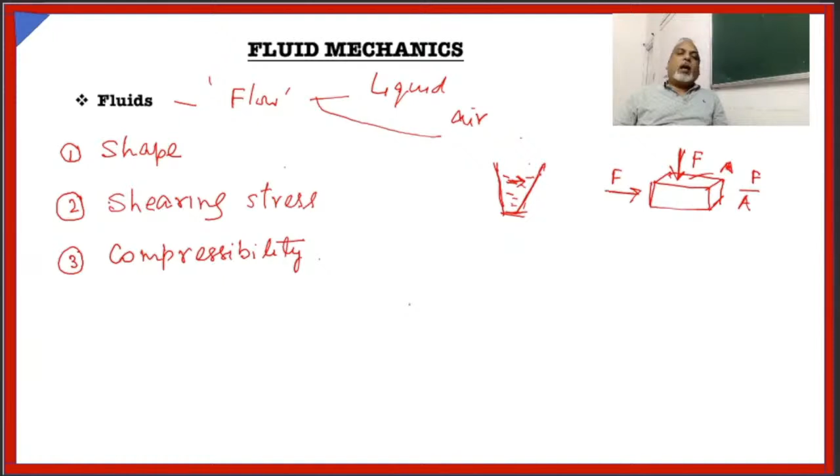Now another factor is compressibility. Solids, we know, are incompressible. Liquids are also incompressible. But in case of air, air is a compressible fluid.

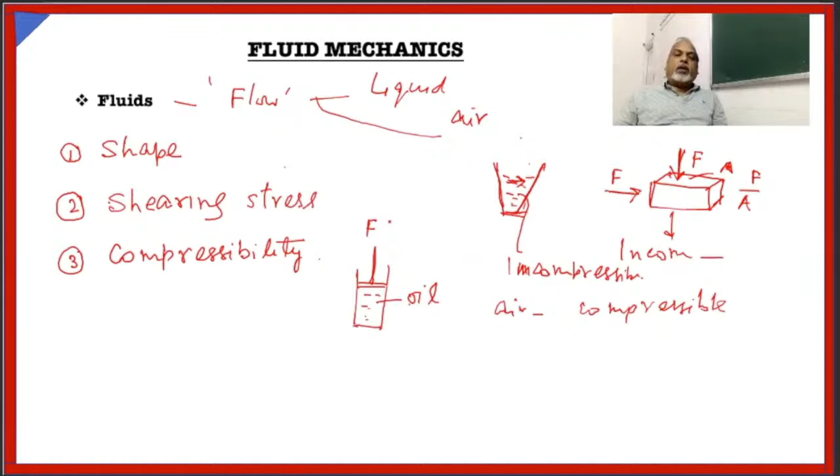Suppose you have a piston, and here you have oil. Oil is a fluid. If you apply a force, you can compress this to an extent only, you cannot compress it fully. Ultimately this liquid will start showing its incompressibility property, and this property is used in mechanical engines.

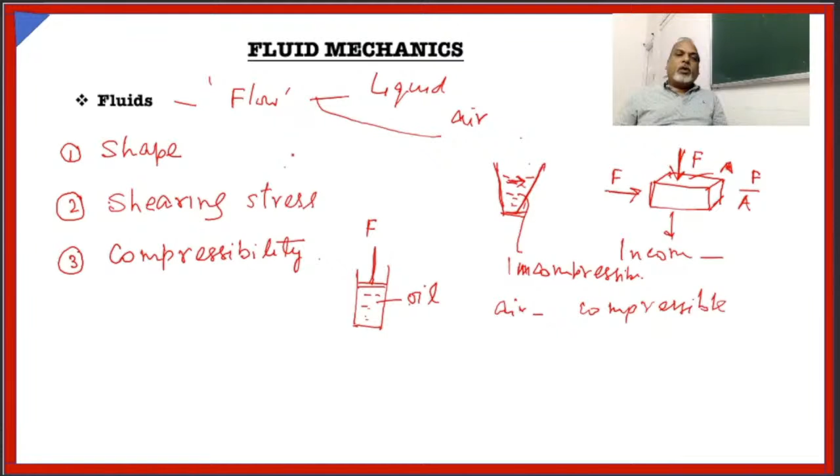This you will study in your mechanical engineering. So this is about fluids. Now let us see what is density. Density is denoted by rho. It is the ratio of mass upon volume.

But here one important fact is there, the mass should be uniformly distributed. Suppose you have a block. If it is a solid block, you can measure its mass and volume, and this will give you the density correctly.

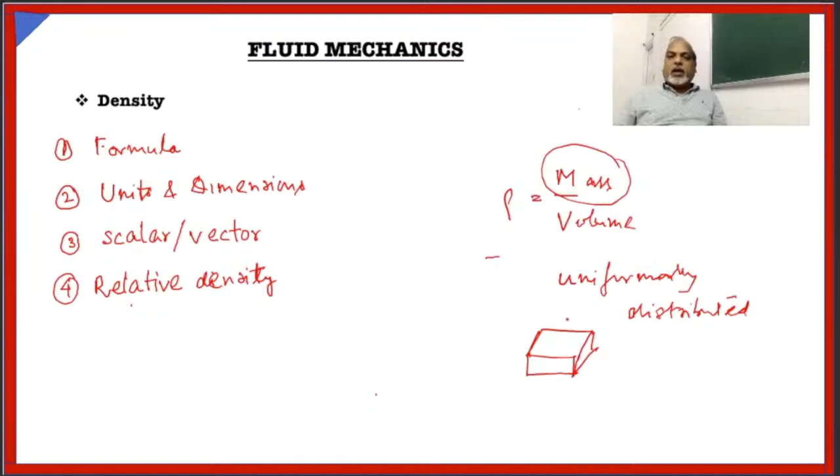But suppose that block is having some cavity inside, then mass will be less, but it will have the same volume by dimensions if you measure. So in that case, the measurement of density will be wrong. You will have error. So please note that it should be uniformly distributed throughout.

In case of liquids also, the same thing is there. Suppose this is the liquid. If you measure its mass and volume, then you can find out the density.

What is the unit of density? Density is mass upon volume, that means it is kg upon meter cube. This is the unit of density.

And what about its dimensions? Dimensions are M, L, minus 3 — these are the dimensions of density. Now, is density a vector quantity or scalar quantity? Of course, mass is a scalar, volume is a scalar, so it's a scalar quantity.

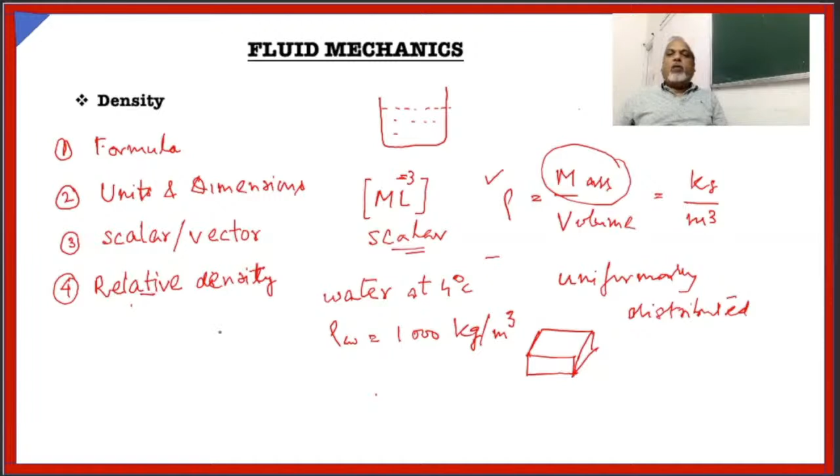Now, what about relative density? Relative density is the ratio of the density of any substance with respect to water density. Like density of iron is 7800 kg per meter cube, so its relative density will be 7 point something.

So relative density is basically dimensionless.

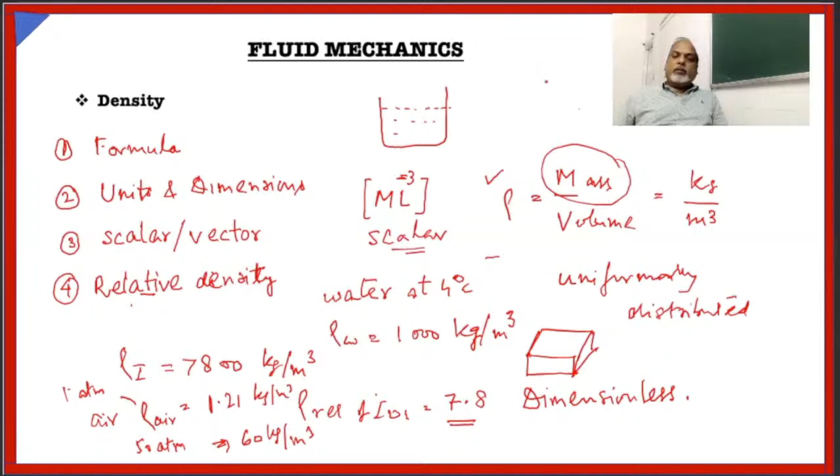So I hope the concept of density must have been clear to you. Now we will talk about pressure, which is very important. What do you mean by pressure? We have seen in case of solids, suppose you apply a force like this, and this is the area, then F by A, it is called longitudinal stress.

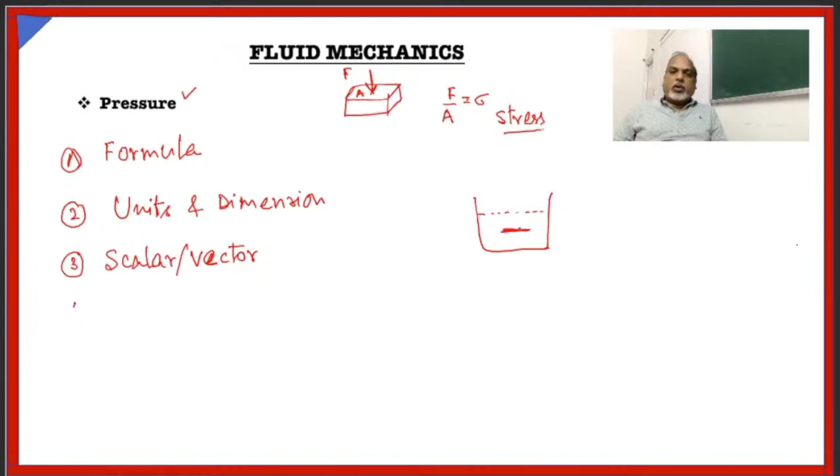But in case of liquids, suppose one object like this, whose area is A, and if this force is F, then F by A, it is called pressure, at this point or on the face of that object.

Now pressure has got its own property. Like if you have liquid here, if you have a point here, then this pressure P will be same from all the directions.

How is this pressure coming on this? Suppose you have an object like this, then naturally this pressure is coming. Suppose you have this water column above this face, so the pressure is coming due to the weight of this water column.

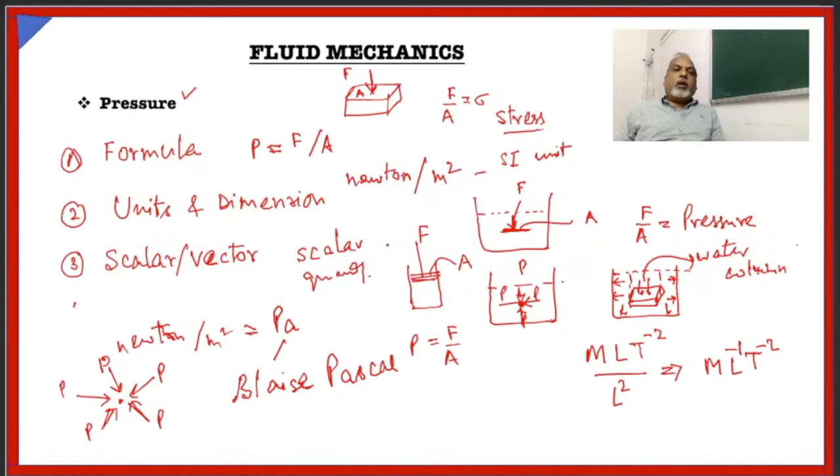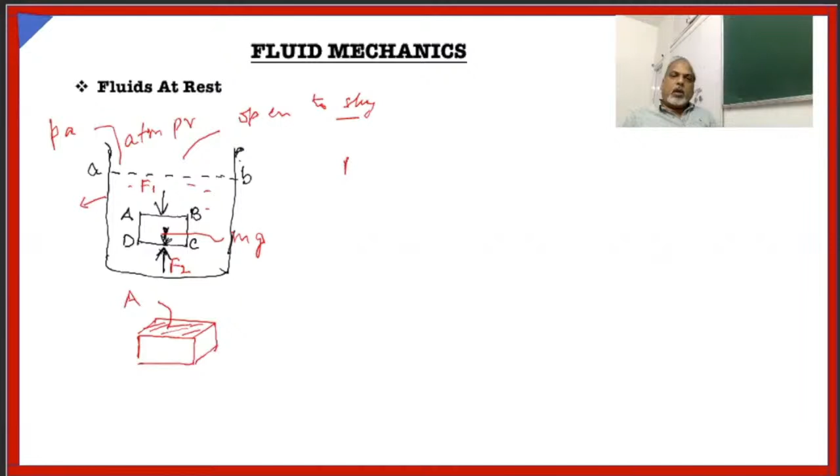Here, area is this - we will be talking about the area which is perpendicular to the force. At AB level, suppose F1 force is there, and at the midpoint of this block there is the weight of the liquid, and at the lower level, DC level, F2 force is acting. F2 is nothing but F1 plus mg.

Suppose P2 is the pressure at the level of DC, and P1 is the pressure at the level of AB. Then F1 will be P1A and F2 will be P2A.

So we can write P2A equals P1A plus the mass. Mass is density rho into volume, and volume is area A times the height. If AB level is Y1 and DC level is Y2, then this becomes Y2 minus Y1.

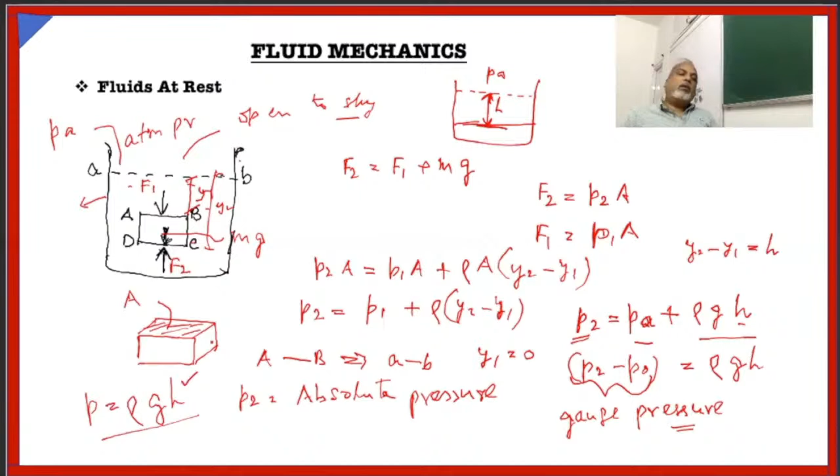Gauge pressure is the difference between the absolute pressure at a point and the atmospheric pressure. So the gauge pressure at any point is simply rho g H. You just have to measure the height, and you can find out the pressure, provided you are given the density.

In the last lecture, we have seen the difference between gauge pressure and absolute pressure. Now we will see how the pressure can be measured.

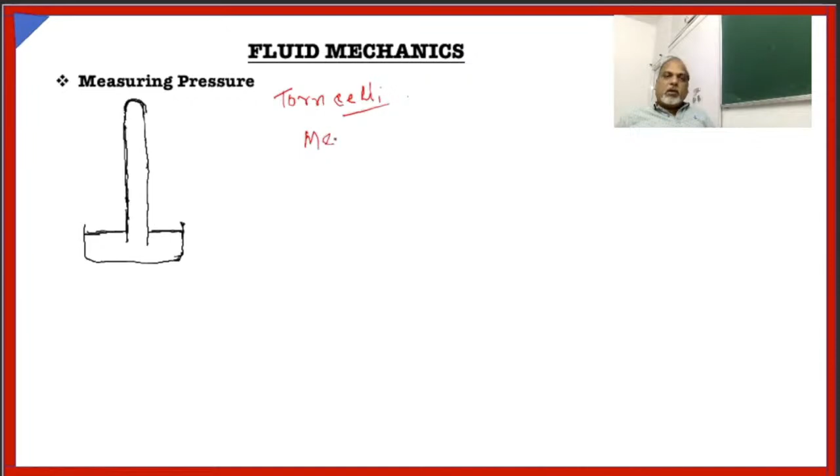Torricelli, an Italian scientist, he devised the mercury barometer.

Let us see what this is exactly. What he did, he filled the glass tube. This is the glass tube.

We filled the mercury in the glass tube, made it inverted, and placed it in a trough which is filled with mercury. What he found was that the mercury descended from the top.

Naturally, what will be here? It will be vacuum here because the mercury was filled here, and now when it is inverted, the level has descended. Here the pressure is basically zero. He found that mercury had descended and stopped at this level.

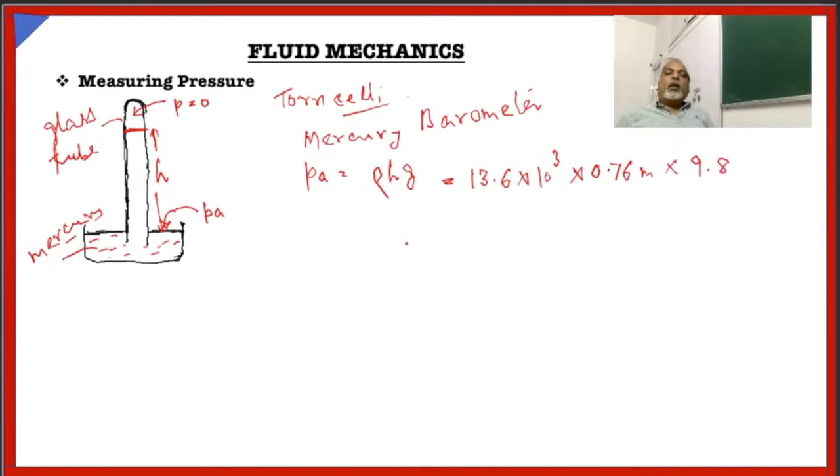So this is how he calculated, and he found that atmospheric pressure is around 1.01 into 10 raised to 5 Pascal, or we can write it as Newton per meter square. So this is the atmospheric pressure we calculated, and this device was known as Mercury Barometer.

Now there is another thing, open tube manometers. What is open tube manometers?

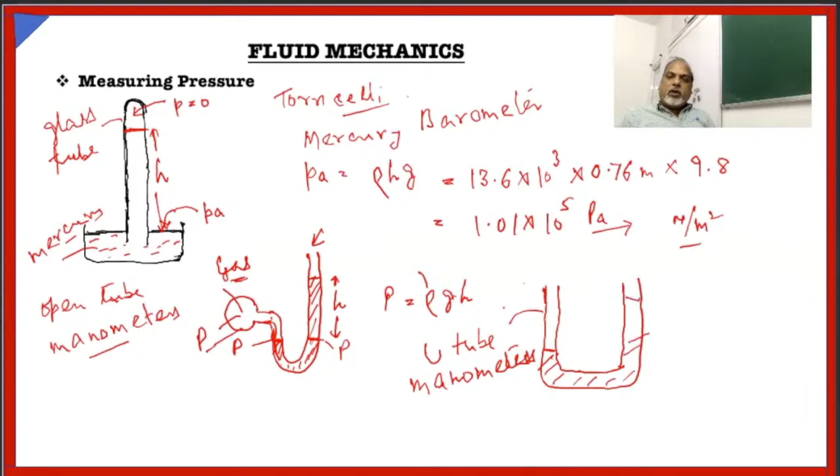Manometers can be used to find out the density of the liquid. Suppose you have one liquid like this, up to this level, and you have another liquid like this, so these levels are same.

Suppose this is X, and this is Y. Then you can write down, at this level, level O, the pressure will be same. So you can write down here: PA plus rho1 G X is equal to PA plus rho2 G Y.

PA cancels out, and here you can get a relation: X upon Y will be nothing but rho2 upon rho1. So you can measure X and Y. If you know one density of liquid, rho1, you can find out rho2. So these are the manometers which are used to find out the density of different kinds of liquids.

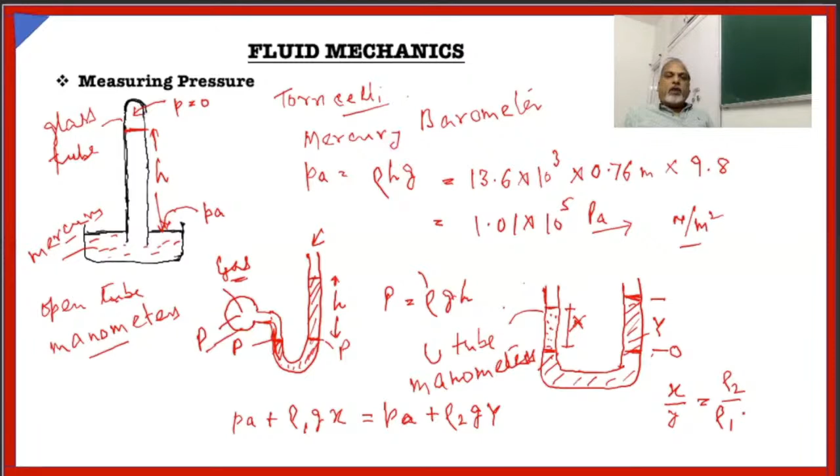Well guys, today we will see what is Pascal's principle. Basically, Pascal's principle states that change in pressure applied on an enclosed incompressible fluid is transmitted to every portion of the fluid and to the walls of its container. That means if you have an enclosed fluid and externally you increase the pressure, then that increase will be transmitted to every portion of the fluid, everywhere inside the container. Let us see how we can go about this.

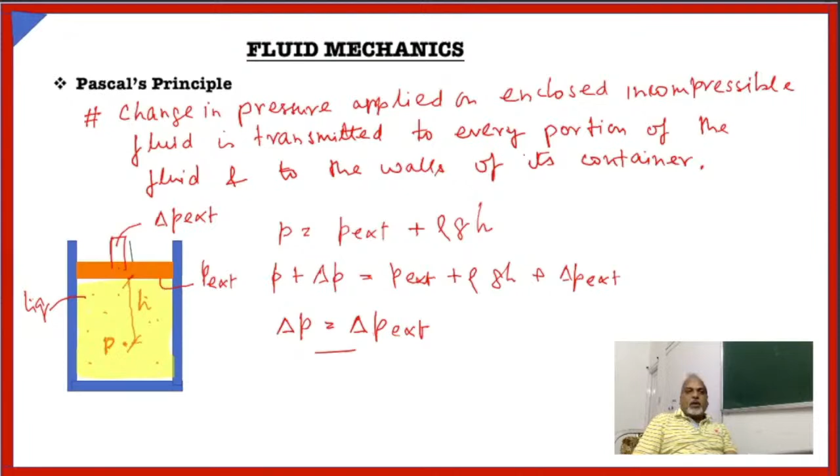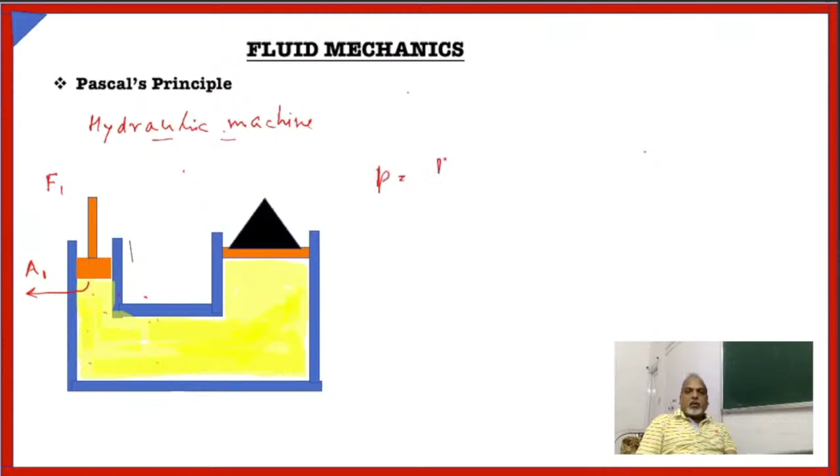Correct? This force is being applied externally, so increase in pressure will be like this. Now as per Pascal's principle, this is transmitted to every point inside the container. That means this pressure must be equal here also, and here suppose this force is downward, then naturally for balancing this is upward, and this area is A2, then this must be equal to F2 upon A2.

This is basically called output force, and this is called input force. So let us see what is output force. It is nothing but F2 is equal to F1 into A2 upon A1. This is the principle of hydraulic machine.

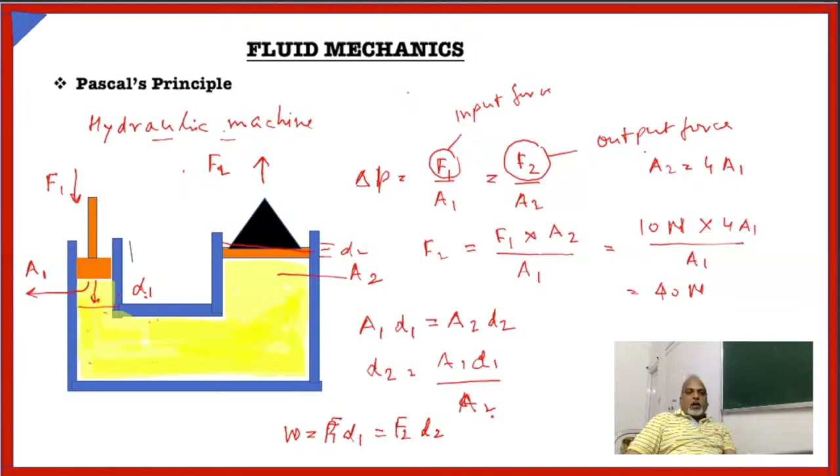With this hydraulic machine, you are going to lift larger or heavier machines. So Pascal's principle is basically used for hydraulic machines.

In this video, we are going to learn about Archimedes Principle. Before learning Archimedes Principle, let us see here. You will find two figures where a block is there, whose face area is A and depth is H, capital H. In this position, it is partially submerged, and in this position, it is fully submerged. When it is partially submerged, then height h, small h, is underwater.

So in both the cases, if you see, it is displacing some water, and we can calculate that water. When it is partially submerged, it will be rho A and h. Suppose rho is the density of liquid, and rho S is the density of solid. So rho A h is the mass of the liquid displaced, and what will be its weight if you multiply it by G.

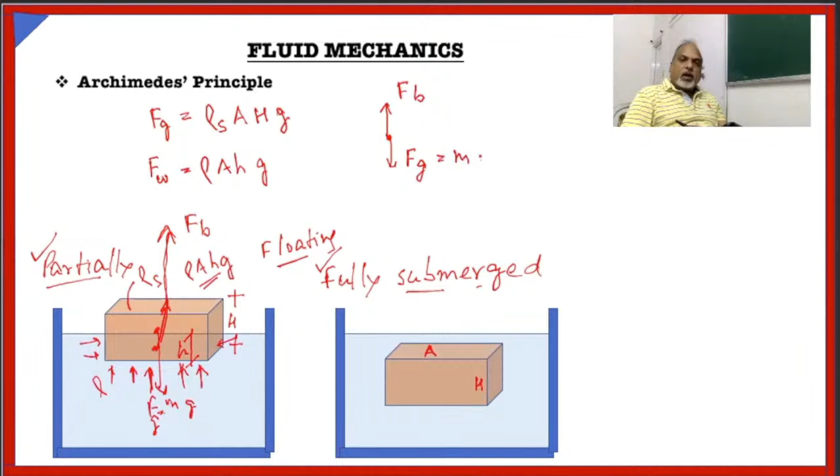It will be like this. Here, this will be acting. A buoyant force will be acting like this. And the weight of the block will be like this, correct? This is called Fg. So if we see like this, here it will be Fb, and downward it is Fg. Fg is nothing but mg, or you can write rho S A H g.

What about Fb? Fb is basically buoyant force, the upward thrust, also called upward thrust. This will be nothing but the weight of the liquid displaced, and that is rho a h g.

If we take this figure, this is figure number 1, and this is figure number 2. For figure number 1, this is your rho a h g.

So what did Archimedes explain, or what is this principle? It says that when a body is fully or partially submerged in a liquid, a buoyant force Fb from the surrounding fluid acts on the body. This we have seen, the pressure due to the liquid acts in the upward direction. The force is directed upward and has a magnitude equal to the weight of the fluid that has been displaced. So this force, Fb, is equal to the liquid displaced by the block.

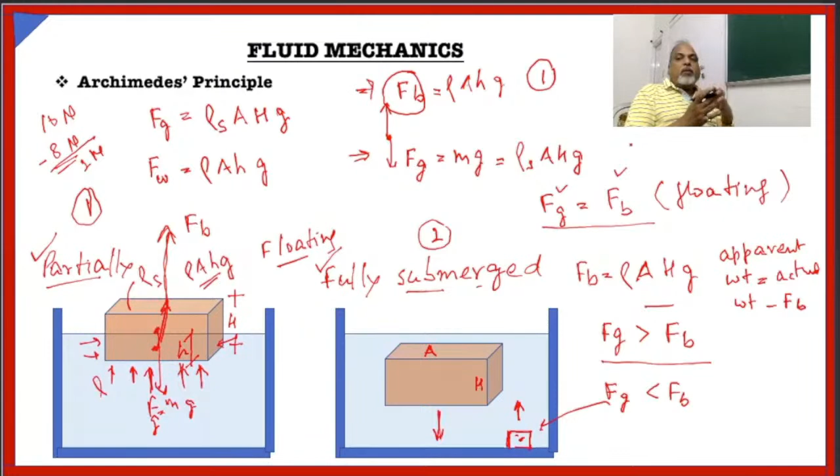When actual weight and buoyant force are both equal, then your apparent weight will be 0. So a floating body does not have any weight inside the liquid, you will not feel any weight of the object. So this is also a very important concept, apparent weight. This is all about Archimedes' Principle.

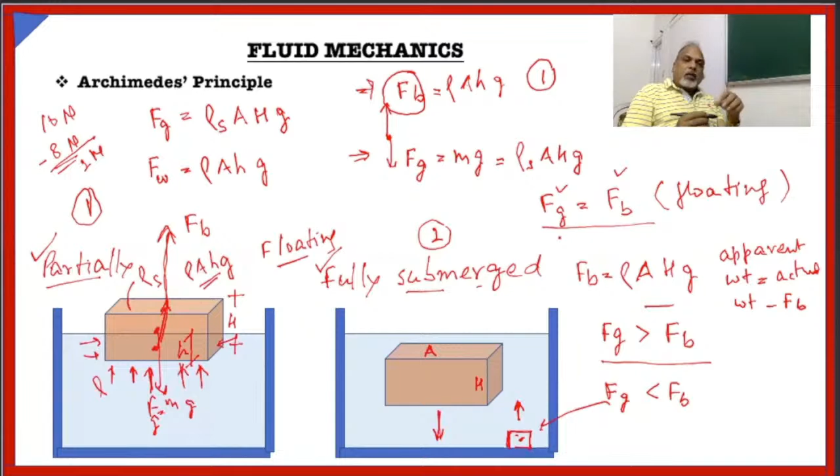In this video, we are going to talk about the equation of continuity. But before talking about the equation of continuity, we have to understand certain other things to understand how we can derive this equation of continuity. Here, basically we will be dealing with an ideal fluid.

Your fluid is ideal. What do you mean by ideal fluid? Ideal fluid means it should have steady flow, it should be incompressible fluid, incompressible flow, and another thing is it should be non-viscous fluid.

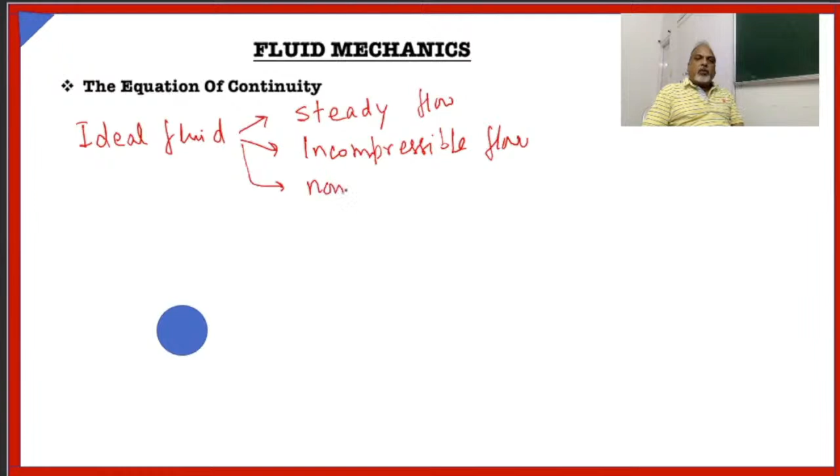And another thing is it should be irrotational flow. This means our flow conditions should abide by these four laws: it should be steady flow, incompressible flow, non-viscous flow, and irrotational flow. What do we mean by steady flow?

Let us take, steady flow means suppose a fluid particle is moving like this. You have a pipe, then at this point, suppose point P is there. At any given point, the velocity of the moving fluid at P does not change with time. It means any fluid particle, if it is coming to this point P, then the velocity should not change, it should remain constant at a given time.

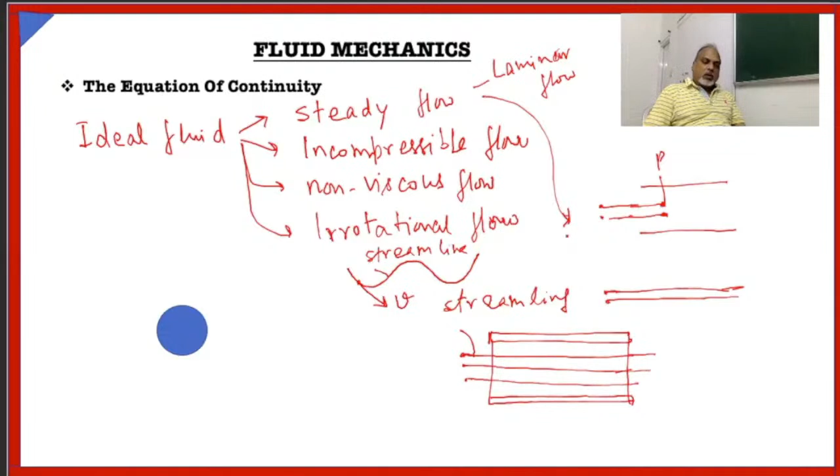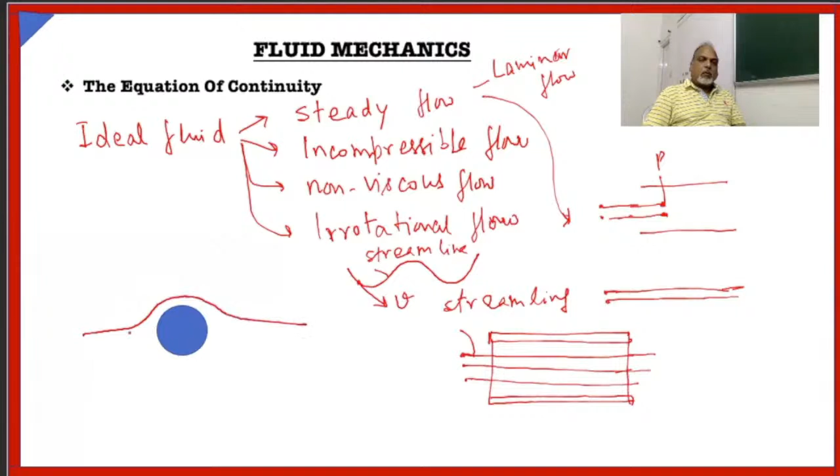Now let us see here. Suppose you have some obstacle, then how you can draw the stream. These curves have to be very smooth, and at any point, the tangent to the curve will give you the velocity at that point of the streamlines. So this is basically something about streamlines, laminar flow, and how an ideal fluid behaves or flows.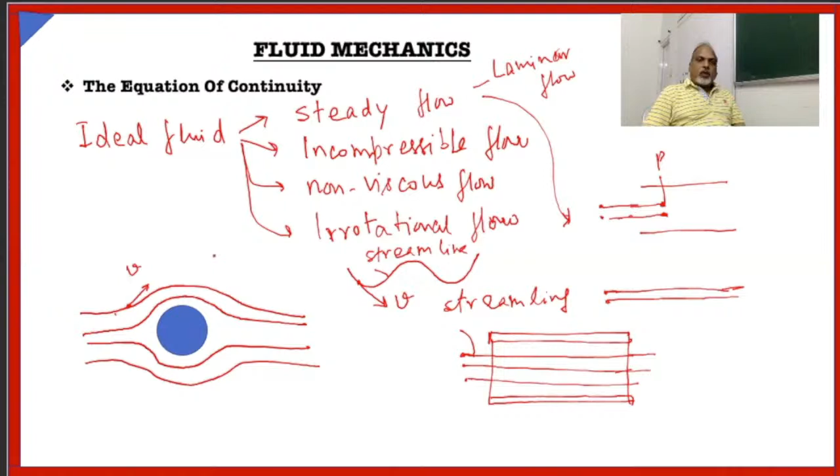Now, with this concept, let us say suppose you have an opening like this. This is point P, this is point Q, and this is point R. These are the streamlines going in this pipe.

So suppose in delta t time, what will be the mass flow inside this? It will be rho into area of this, suppose that is AP, then if velocity here is Vp, in delta t time, this mass will flow up to distance Vp into delta t. So rho AP into Vp into delta t will give you the mass flow in delta t time through P.

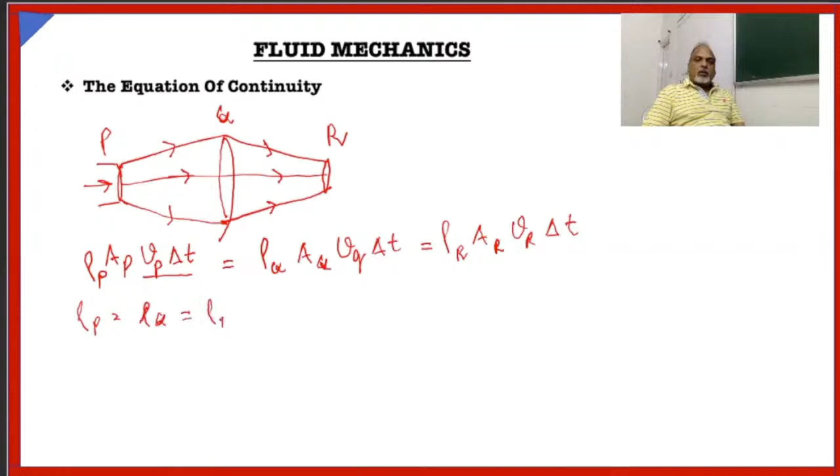That means what will be left? AP VP is equal to AQ VQ is equal to AR into VR. That means area into velocity, this product remains the same at any point in the tube, and this is called the equation of continuity.

So in simple terms, V1 A1 must be equal to V2 A2. This is your equation of continuity. The product of velocity and area remains constant at each point in the pipe or wherever the liquid is flowing. And A into V is nothing but volume flow rate.

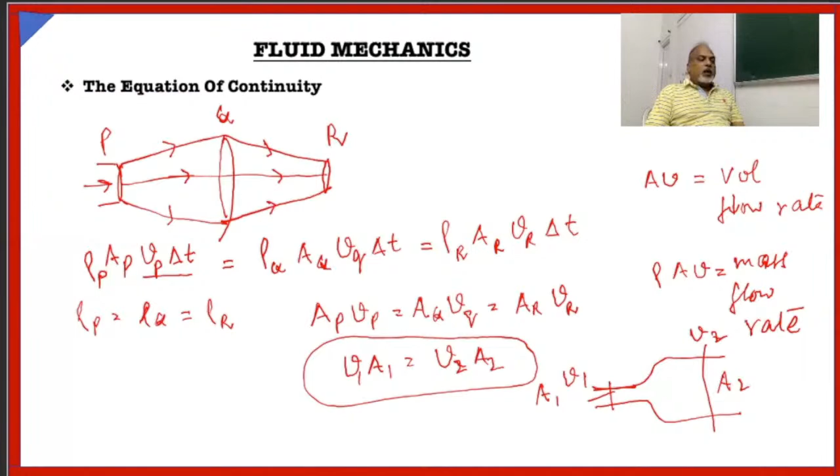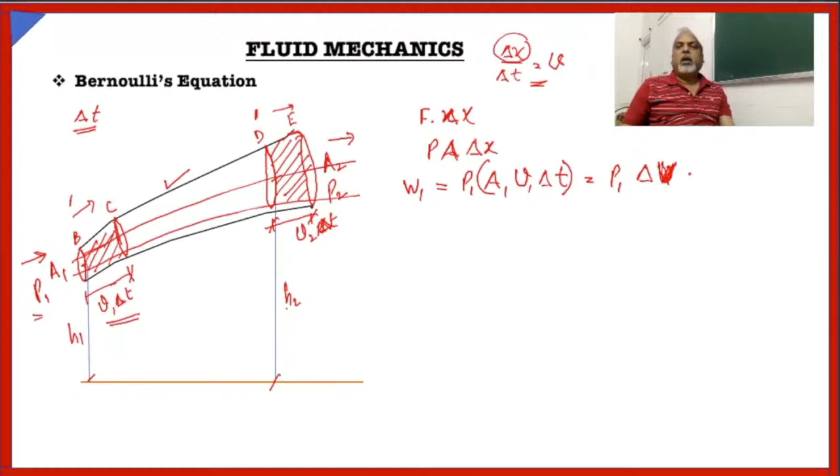Now what is this? This is the volume of the liquid advancing in time delta T. So you can say in this fashion that this much work is required for moving the liquid from B to C.

Likewise, at the further end, W2 will be P2 into A2 V2 delta T. Delta V is same because in delta T whatever liquid is advancing, the same is coming out. So in both the cases delta V will be same.

So what is the total work done? Total work done will be W1 minus W2, and this we can write as P1 minus P2 into delta V. Why W1 minus W2? Because W1 is positive work done, whereas W2 is negative work done, because at the farther end, at the output side, the system is doing the work. It is getting the liquid outside, you don't have to do any work. But at the B end, at the initial end, you have to do some work, and basically this work is being done by the surrounding fluid.

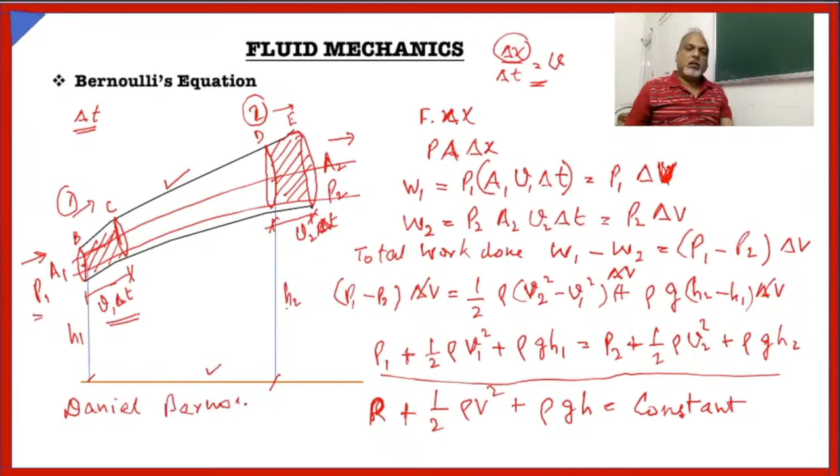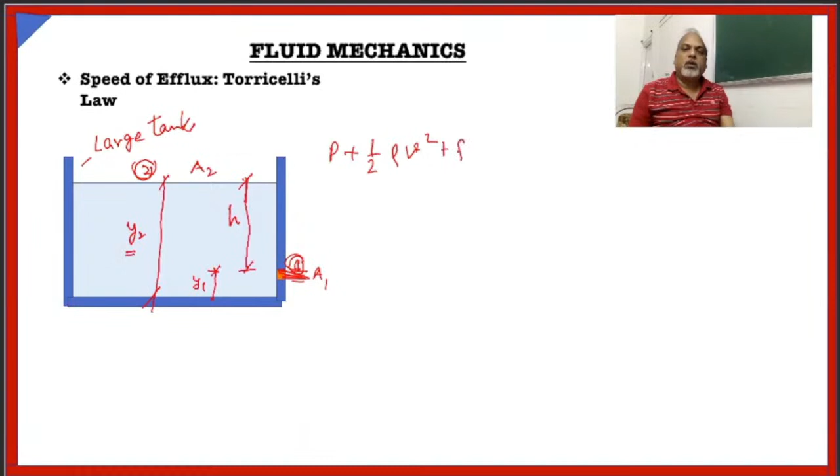So at point 1, our Bernoulli's equation is basically P plus half rho V square plus rho GH, it is constant. So at point 1, what is P will be? Now since water is coming out, it will be experiencing the atmospheric pressure. So it will be PA plus half rho, the density of the liquid, and suppose V1 is the velocity, this is what we have to find out, plus rho G, and if we take the bottom as a reference line, then rho G Y1 will be this thing.

This must be equal to what is at point 2. Here again it is open to sky, so atmospheric pressure will be there, plus half rho. What about V2? Suppose if it is a very large tank, then the surface will be almost at rest. It will not have any velocity, so here the velocity will be 0. That means this cancels out, and the rho cancels out.

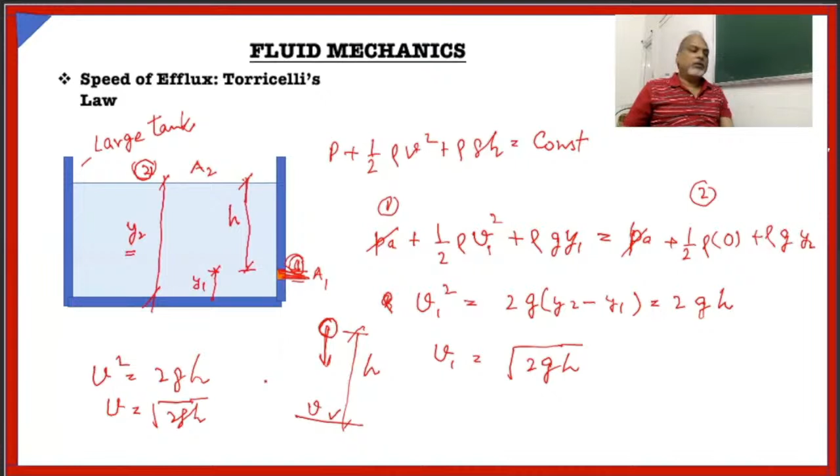In this video, we are going to talk about Venturimeter. Venturimeter is a measuring device, basically, and what it measures is the velocity of incompressible fluids.

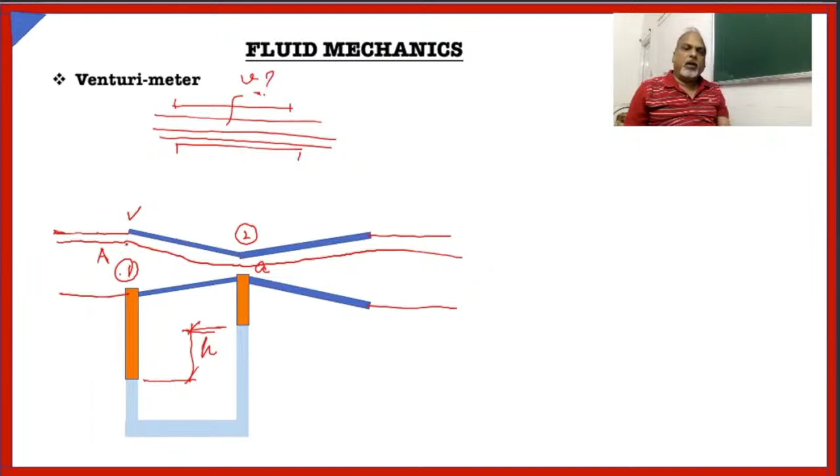In this Venturimeter, one end is broad and the middle portion is constricted, having a smaller area. Suppose at point 1, area is A, and at point 2, area is small a.

As per the continuity equation, we know that V1 A will be nothing but V2 a, where V1 and V2 are velocities at point 1 and 2. So from here, your V2 is A upon a into V1. This is due to the continuity equation.

Now, we have attached a manometer between point 1 and 2, with a fluid here of density rho M. This is the broad end, and at point 2 it is small, having a small area. Naturally, from the continuity equation, velocity at point 1 will be less and velocity at point 2 will be more.

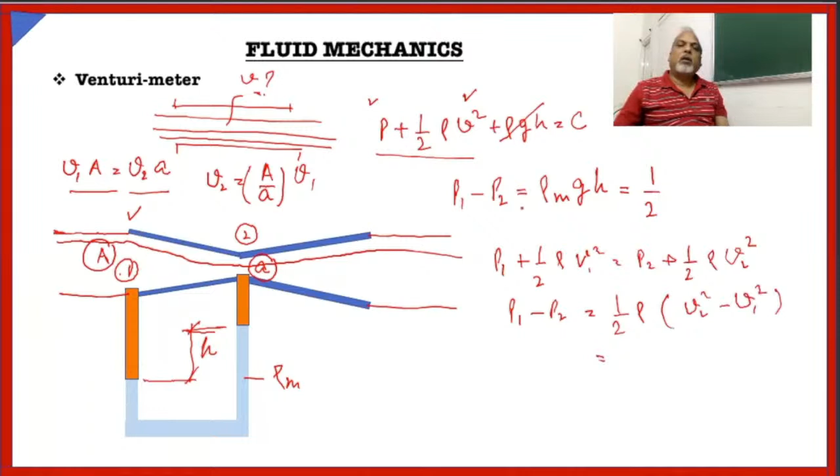That means P1 minus P2 is nothing but half rho (V2 square minus V1 square). And we can replace V2 using V2 equals A upon a into V1, so half rho V1 square times (A upon a square minus 1), taking V1 square outside.

So this is your rho m g h equals half rho (A upon a square minus 1) V1 square. So V1, the velocity, we have to find out, because it will give you the velocity inside the normal pipe through which we have attached the Venturimeter.